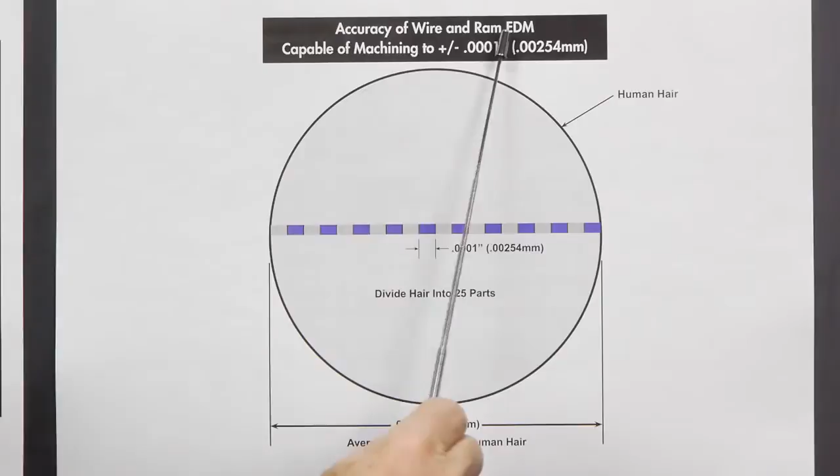This is a diagram of a human hair. Average thickness of a human hair is 0.0025. That's 2.5 thousandths. Now, a tenth, you divide this hair into 25 parts to get 1/10. And this gives you the accuracy of wire and RAM EDM capable of machining plus or minus 1/10, one little section of a thousandth.

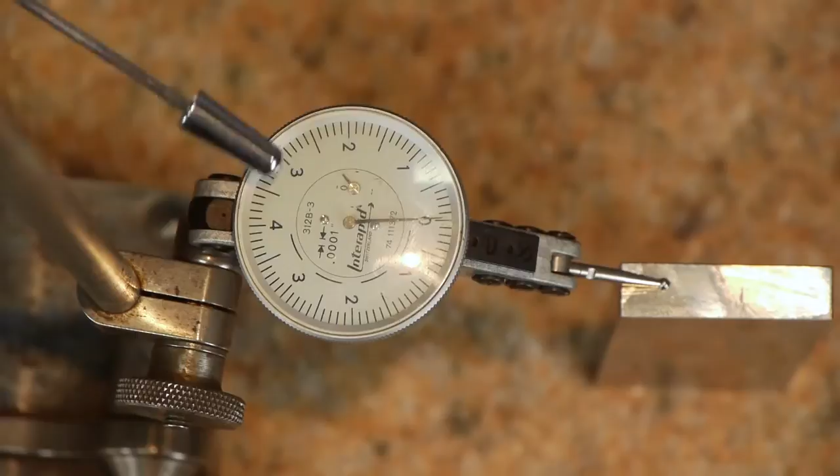I'd like to demonstrate to you the thickness of a human hair. Many people think of a human hair as extremely accurate, but I'm going to demonstrate with this tenth indicator and this gauge block the thickness of a human hair. This is what we call a tenth indicator. Each line is 0.0001, and this is 1 thousandth, this is 2 thousandths, and this is 2.5 thousandths. From here to here is the average thickness of a human hair.

I have on this gauge block a human hair. This is a tenth indicator. I approach the hair. Approximately 2.5 thousandths. I go back again. The thickness of a human hair is approximately 2.5 thousandths.

I worked for many years as a tool and die maker. I started out in a very sort of crude shop. Then I finally got into a shop where we did precision grinding. And I could grind parts within 1/10 of a thousandth. So I understand what a tenth means. But a lot of people don't understand what 1/10 is.

They put down plus or minus 5/10 if the part is 3 inches, 10 inches, or even 18 inches. And I want to explain a little bit how important it is to understand what 1/10 is, or when you put down plus or minus 5/10. Let's just take a look at this piece over here.

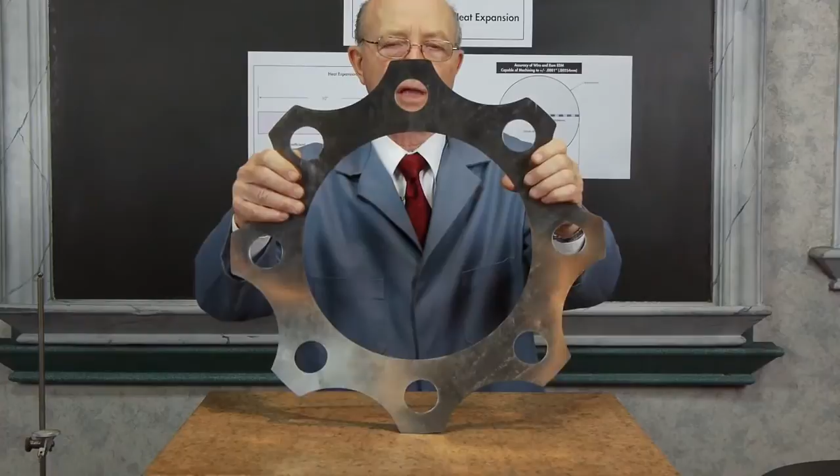This is a flex element. We made thousands and thousands of these flex elements. And what they are, they're put between couplings. They mount a number of them together and it allows a coupling to be flexible. Many years ago, we received an order for large flex elements.

And they wanted the distance between the holes, like these two holes, to be within plus or minus 5/10 of a thousandth. Now, as stated earlier, we can EDM with accuracy plus or minus 1/10 of a thousandth. But the larger the distance, the more careful and the more skim cuts we have to do, and it gets to be more expensive.

This is not meant to measure plus or minus 5/10, but they measured their holes like this with it. Then I knew they didn't understand what plus or minus 5/10 meant. Now let's look at this chart over here to explain heat expansion.

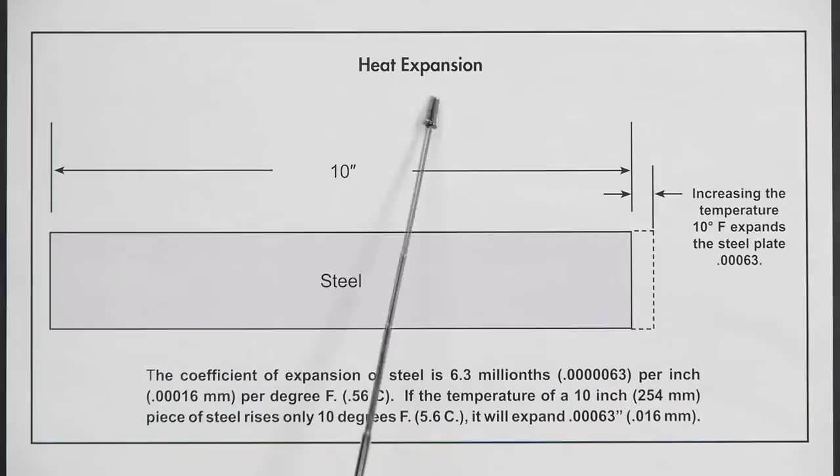Heat expansion. The coefficient of expansion of steel is 6.3 millionths. That's 0.0000063 per inch per degree Fahrenheit. If the temperature of a 10-inch piece of steel rises only 10 degrees Fahrenheit, it will expand 0.00063 of an inch, or a little over 6/10 of a thousandth.

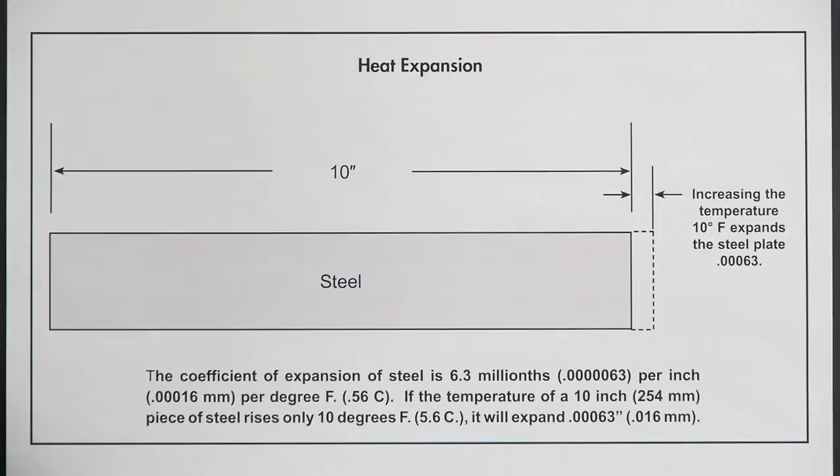If you had a part that measured 10 inches long, and it had to be within 5/10 of a thousandth, and somehow, just by handling it, it became 10 degrees warmer, it would expand 6/10.

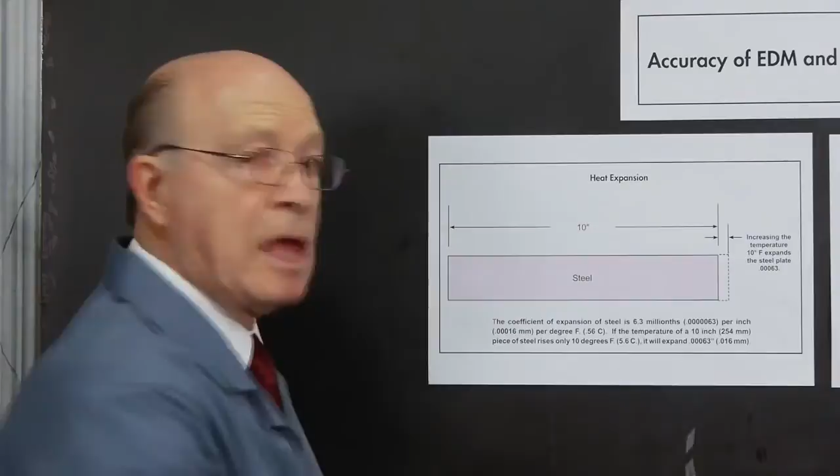It would be out of tolerance. And notice also, the coefficient of expansion of steel is 6.3 millionths per inch. Different metals have different expansion rates.

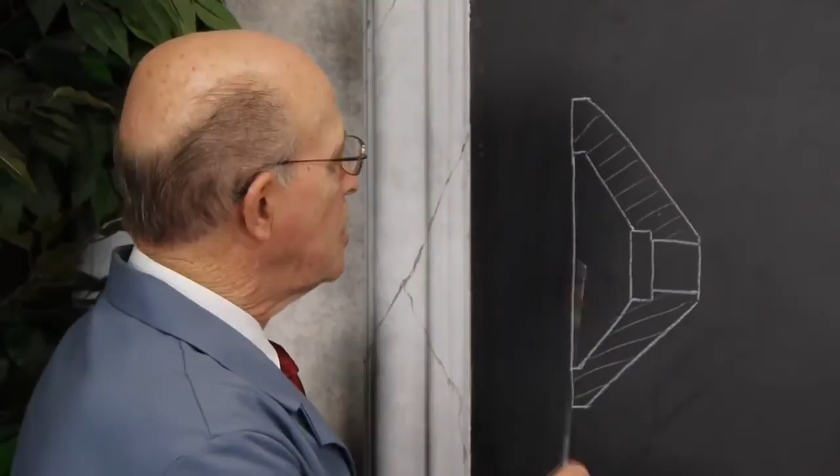I had an interesting experience many, many years ago in New York City when I was working in a machine shop as a tool and die maker. I was on a lathe and this piece was magnesium. It was a very hot day. I was using a boring bar and machining a hub similar to this, boring out the cavity inside that had very tight tolerances. We sent the part after it was done, and they take it back into a nice air-conditioned inspection room.

And that's 68 degrees. Now, I machined that when it was warm; we don't have air conditioning in the shops in New York City. And what happened, it shrunk. Magnesium shrinks twice as much as steel. Fortunately, it got too small, so they returned the part to me, and I had to open it up again to make it within tolerances.

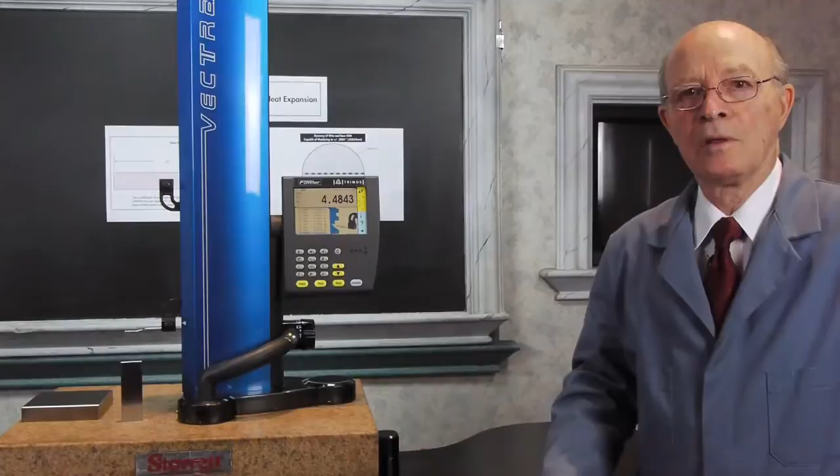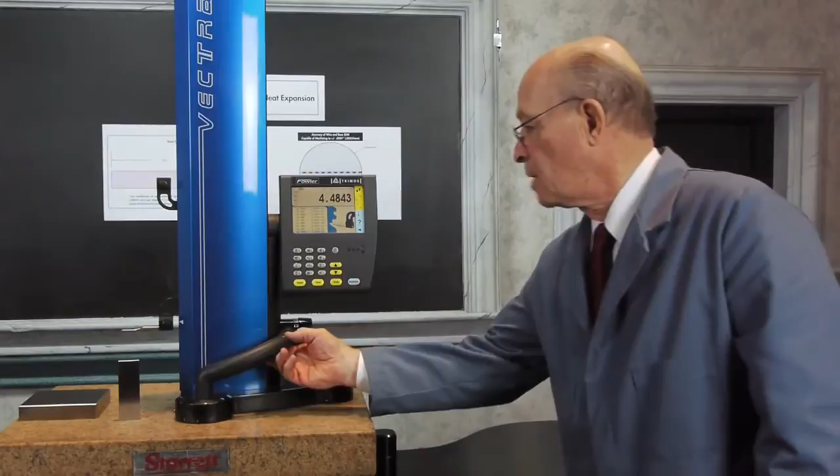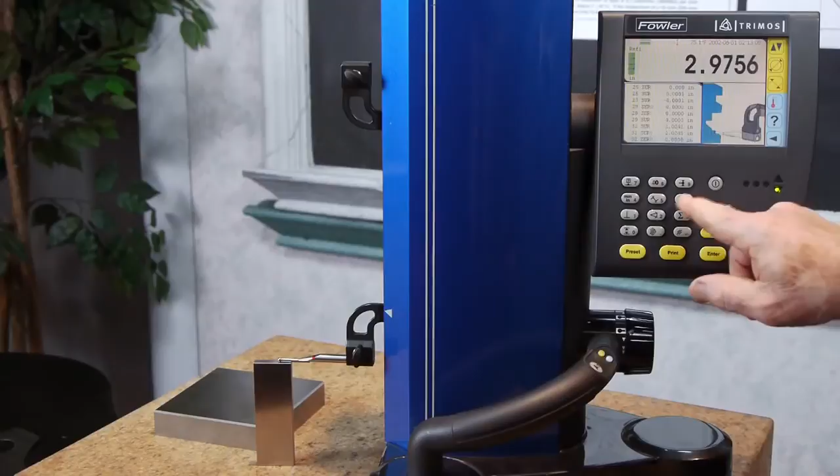This is a digital height gauge that we took from our inspection department, and we're going to show you what happens with heat expansion with that 4-inch gauge block. There's a button that says air, and it puts air underneath so we can easily move this. Let's take a close look at what happens. I'm going to lower it down on the 4-inch gauge block and zero it out. Zero it out, raise it up.

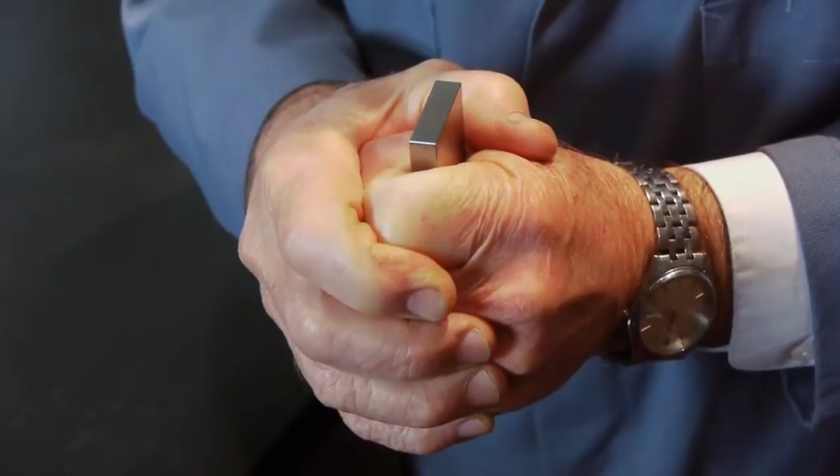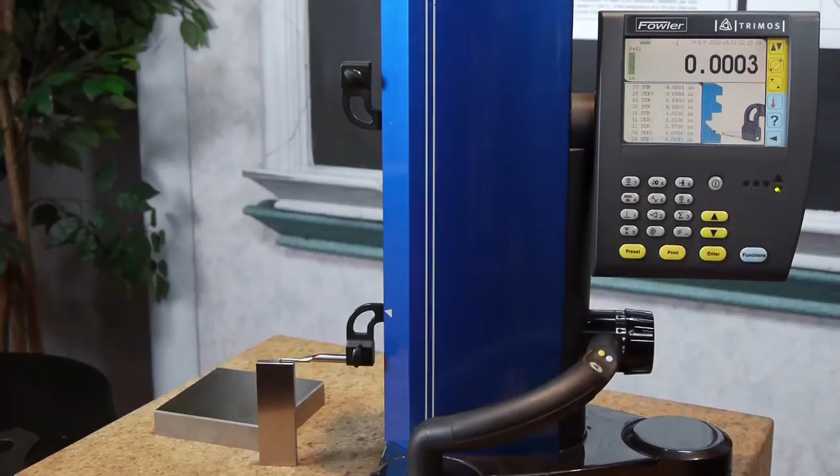Now I'm going to take this gauge block away and put it within my hands. I'm just using the warmth of my hands on this gauge block. Now I'm going to place this warmed up gauge block and bring it down again. It expanded 3/10 of a thousandth just from the heat of my hands. This gives you an example of heat expansion; you have to be careful when you handle gauge blocks. Just the warmth of your body will change the dimension of a gauge block.

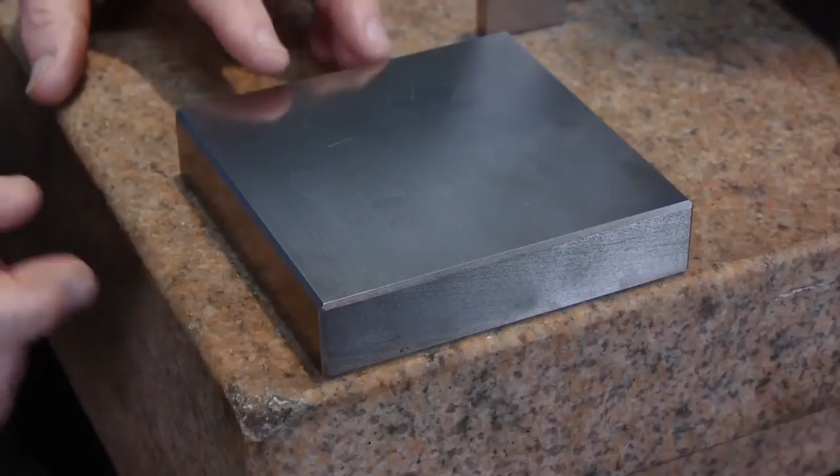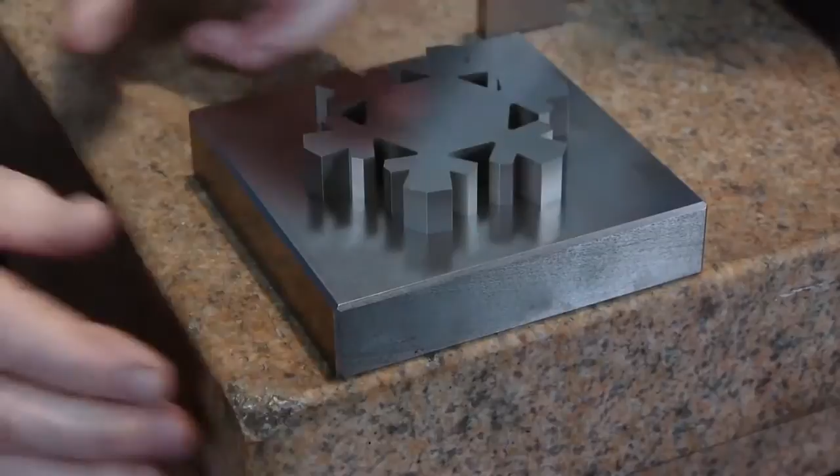Let's look at this snowflake to see how accurate we can cut with wire EDM. This is a snowflake that we EDM'd, and it's made out of 2 pieces of tool steel. I don't know if you can see the edge of it here, but I'm going to push it over to the edge and push it out. Slide over here. This gives you a little bit of an idea of the accuracy that we can do with wire EDM. We can make this a press fit or a slip fit, and we're making this just so air can escape from the sides of that cut.

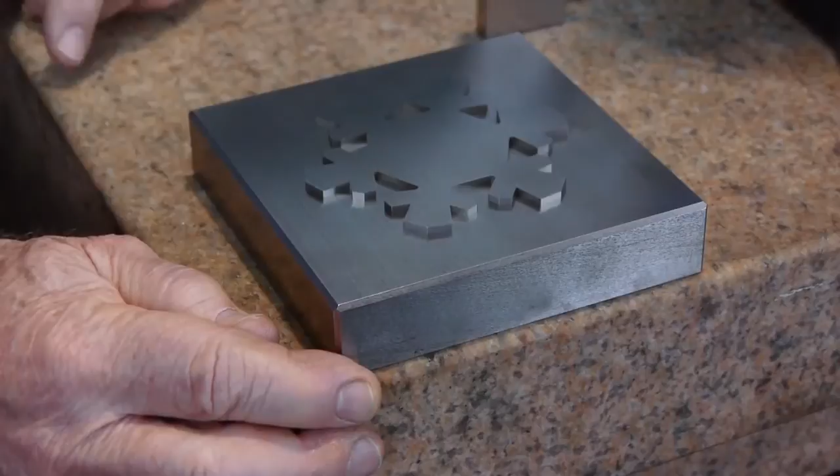As you can see, it goes right down. To give you another idea of it, we'll push it out again. There it is again, and we just go over here. The escaping air just has it fall right flat down. Now I'm going to do one more thing. I'm going to take this snowflake and twist it around. Now I'm going to turn it around, and if I carefully line it up, it has to be exactly lined up for it to work.

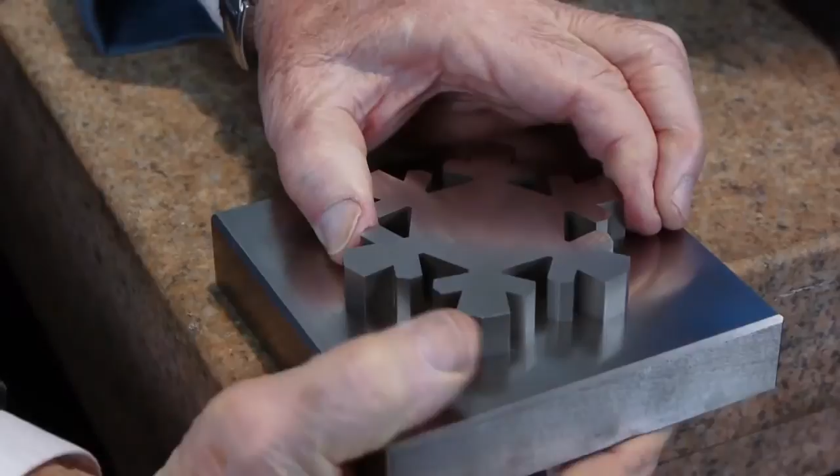You can see it goes right down. Bring it up again, and it will slide down just like before. Now you can see from the grain marks that it's in a different position. That's how accurate we can cut with wire EDM.

I'd like to speak to tool designers and engineers concerning putting part accuracies on the parts that you're making. Some parts require tight tolerances, but if you can loosen them up a bit sometimes, it can reduce the cost of machining these parts.